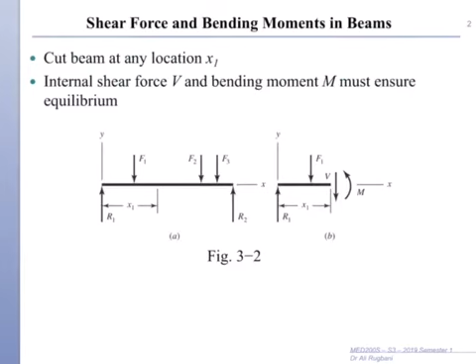Today's lecture is load and stress analysis. In this lecture, we look at load and how to calculate stresses and how to find different types of stresses. We start with the revision of what was covered in strength of materials. I have a few examples on how to calculate reactions.

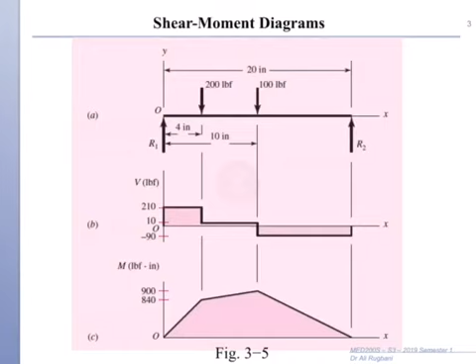So the procedure is first identify loads and the forces with their point of action, and then you calculate missing reactions or loads. Then you draw shear force diagrams and bending moment diagrams. So in this example, we have the shear force diagram and bending moment diagram based on the given loads.

The purpose of the shear force diagram and bending moment diagram is to identify critical sections in any body or any machine element, in this case this beam. So for this beam, as you can see, at this section, here we have shear force of 90, and there is also a bending moment of 900.

So at this section, this cross section of the beam has the maximum bending moment and also has shear force. Maximum bending moment and force will give you an indication that stress in this section will be the largest along the beam, which also means that this section is expected to be critical, this point. So any failure, if we increase load or if the material is weak, the failure will happen in this section.

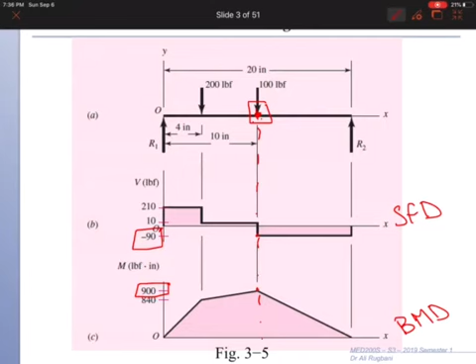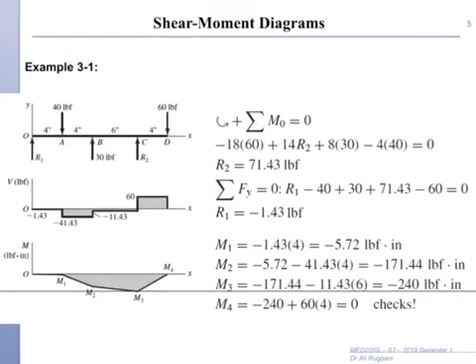In other words, if you design your beam and you select your material and maybe also size to give you strength that is larger than the stresses in this section, you can prevent failure. Okay, so let's go on. I have a few examples just to refresh your memory on how to calculate missing forces or reactions, and then how to build shear force diagrams and bending moment diagrams. Okay, the next example with distributed load.

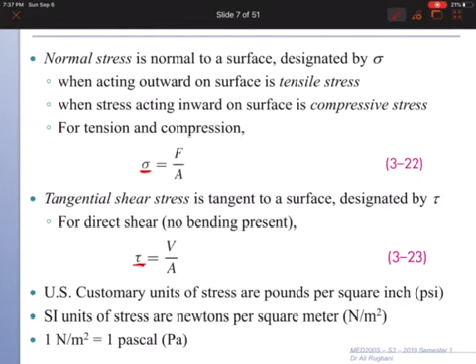Okay, so stresses. As I said, we have two main types of stresses: normal stresses and shear stresses. Normal stress is a stress coming out of the surface or going inwards to the surface. So when you cut, you will get a cross section. Let's say we have a beam and you cut the beam at this cross section. Any stress coming out of the cross section surface or going towards the surface is normal stress, represented by this symbol, sigma.

If stress is going out of the surface, we call it tension, and then it is positive. If it is going towards the surface, then it is compression and it is negative. The other type of stress is shear stress. So if I have a machine element like this, this is shear stress. Shear stress is tangent to the surface, in the surface itself, and it's represented by this symbol, tau.